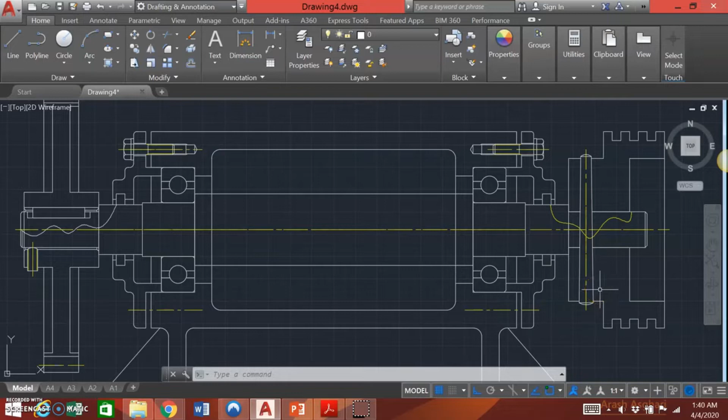It really requires some time for us to refer back to the drawing and then do the proper trimming. For instance, I forgot to trim this part, and also this part, as well as this part and this part. I hope I already trimmed accordingly.

Now if we refer back to the diagram here, we need to have a platform to place this bearing unit, and then we have a bolt and nut here to fix the bearing unit on that platform. So we need to draw the platform first.

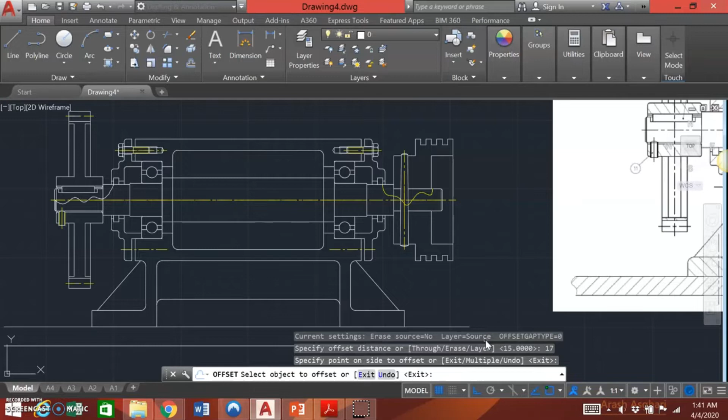What you can do is just pick a line from here, adjust accordingly, and then for the thickness of the platform, I'm just going to use the offset function and put 17. So the distance is 17 here.

Now we are going to insert the bolt and nut, which is part number 8. Washer is part number 9, and then the nut is part number 10.

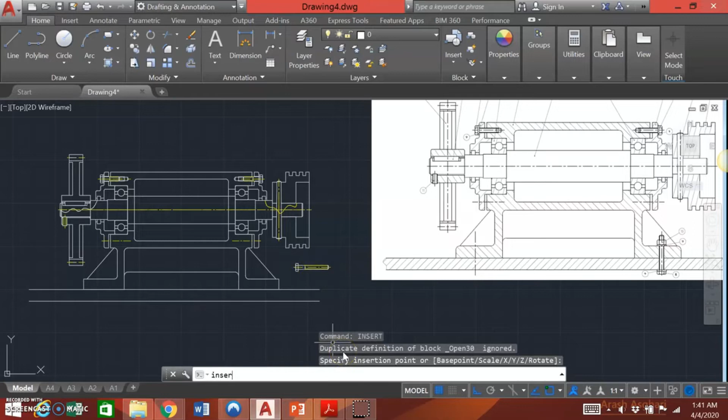Browse part number 8, open. Just place it here first, and then insert part number 9. This is the washer, so we're just going to place it here.

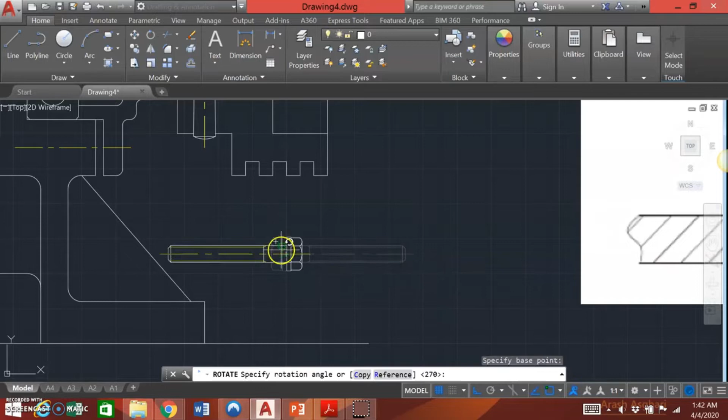So we have the bolt and the washer already. What we need to do is rotate this. Just pick some point, and then the rotation is minus 90. Sorry, it should be 90.

Now we want to move this to the bottom, so we pick this, move to here, and then from here we move, because this thickness is 17, so I'm just going to put 17.

After that, from here we need to move to the left side. Just pick, and then we move here by 20. Move, specify the point, and then move here by 20.

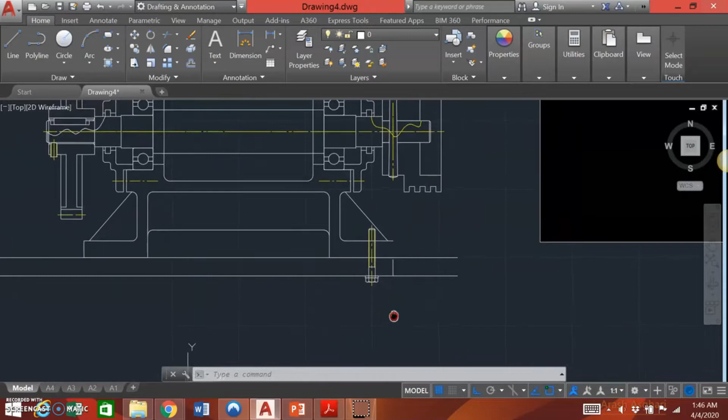I don't know what happened, suddenly this part disappeared, but it's okay, maybe during the time I copied it. So we can just move this back.

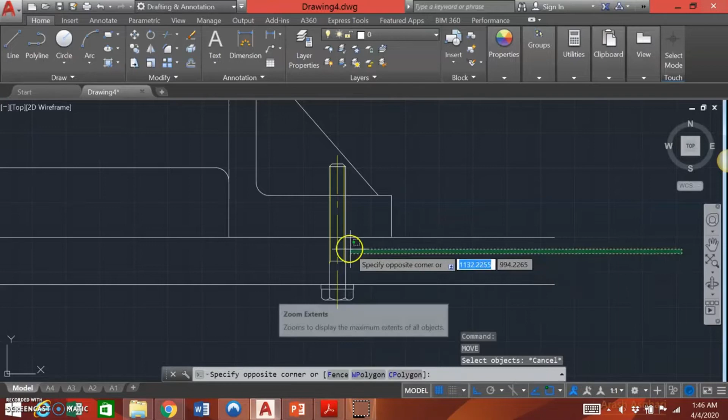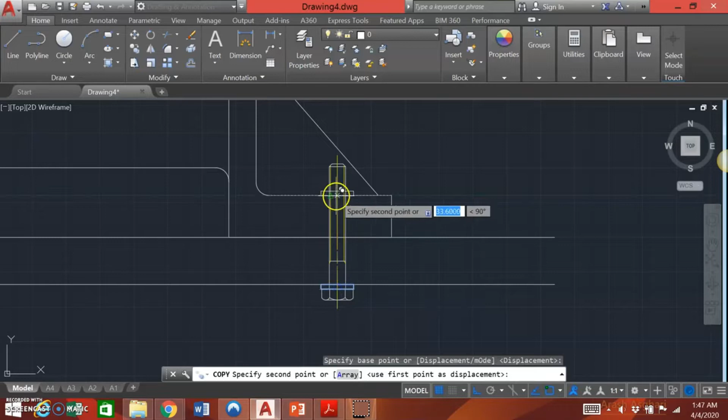Now we already have the washer at the bottom, and we need to also move one to the top. So we can copy the washer, specify here, and then we can go here. So because we have two washers, at the top here we need to install the nut.

Nut is part number 10. Insert, browse part number 10, open.

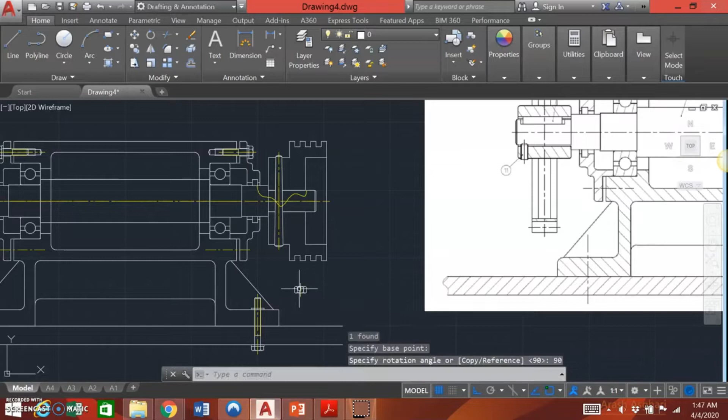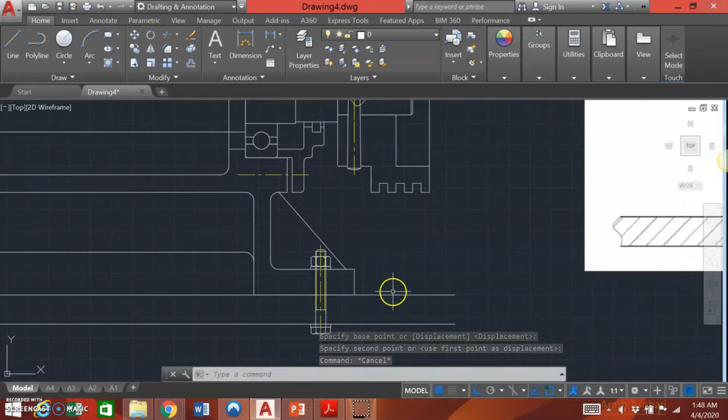What we need to do is rotate it first, 90, doesn't matter. So we are going to move this to here. Done, we already put a platform, and we have done the bolt and nut here.

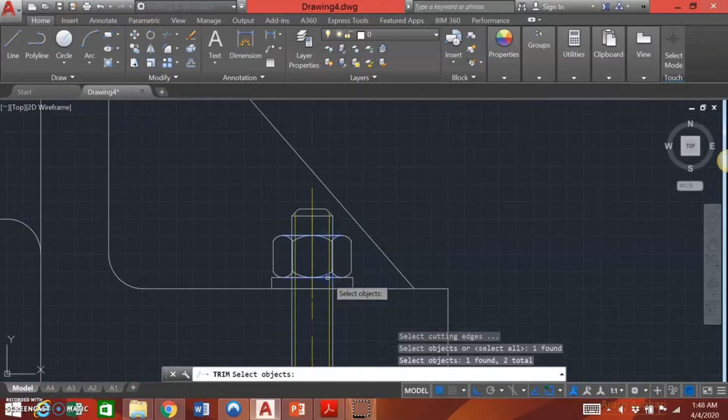Still need to do some trimming. Explode, so we need to do some trimming. I'm just going to choose this line and this line, enter. So all the lines that are not necessary shouldn't be there, and then trim. So this line, enter. All the unnecessary lines shouldn't be there.

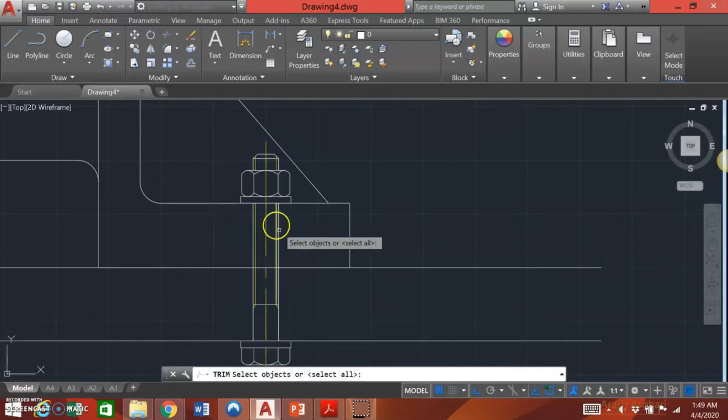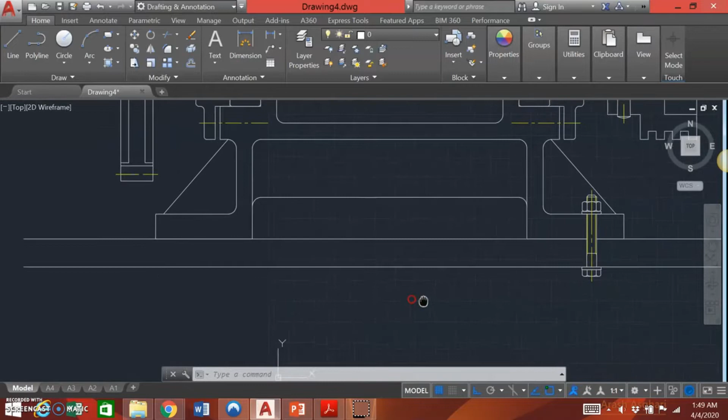Same goes at the bottom here. Enter, and then, so at the end it's going to be something like this, and we are just going to cut. We are going to close both ends of the platform by using...

We are going to draw a spline to cut this platform. So choose spline, and then, okay, like that, enter, and then same goes here, enter.

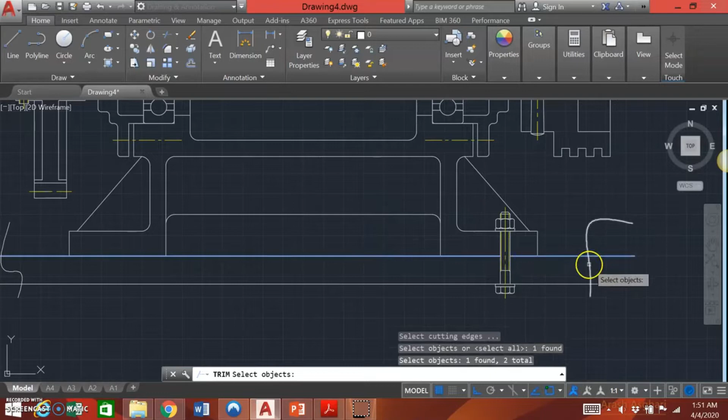Anything that is out of this part needs to be trimmed. Something like this. I forgot to put this. Okay, the center line here, you can join them together.

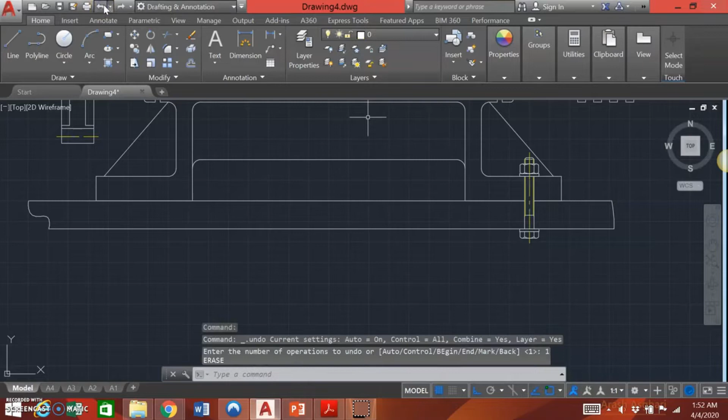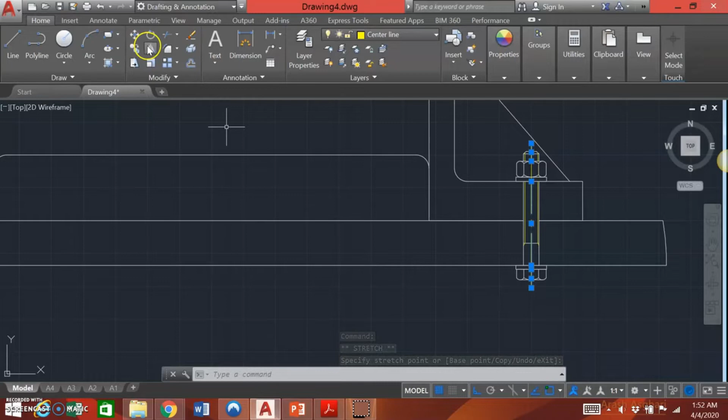Join, so that it's going to be only one center line, sorry. So join, then we can just copy or mirror, specify the base point, and yes, so we have both sides like this one.

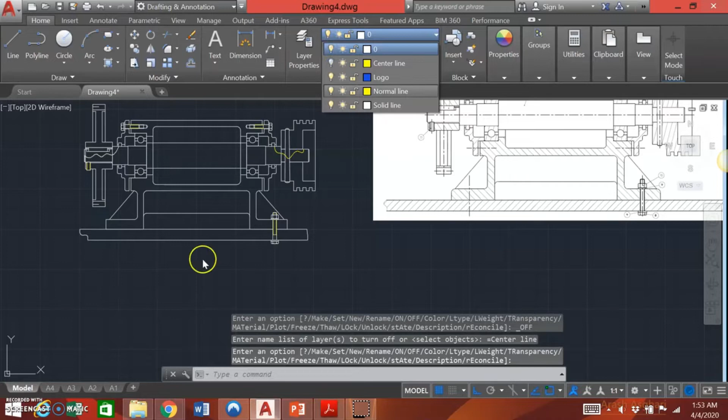The next thing is to do some hatching. I'm going to start with the platform first, but in order for me to do the hatching, I just need to turn off the center line, and I'm going to do some hatching here and also here first. Change the ratio here to 30 so that you're going to have something like this.

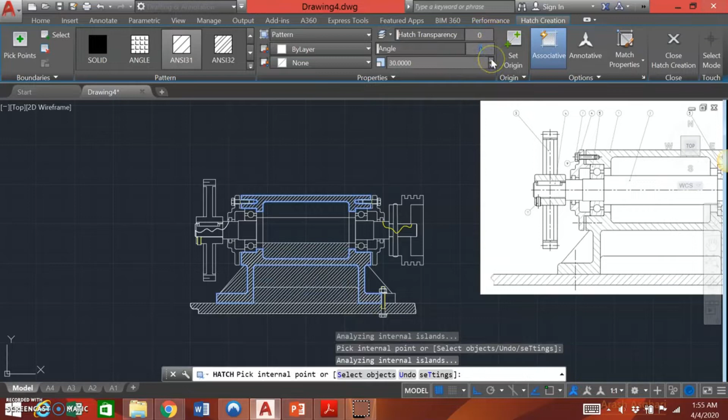And then I'm also going to do the hatching here, and also the top one. But if you can see, I don't want it to have the same direction, so we can change here to maybe 90.

I also will do some hatching here. Hatching this part, this part, this part, this part, this part, and this part, and change this to maybe 0 again. And then the hatching here.

So we still need to do some other trimming, the ones that maybe we left, also this one, this one, this one.

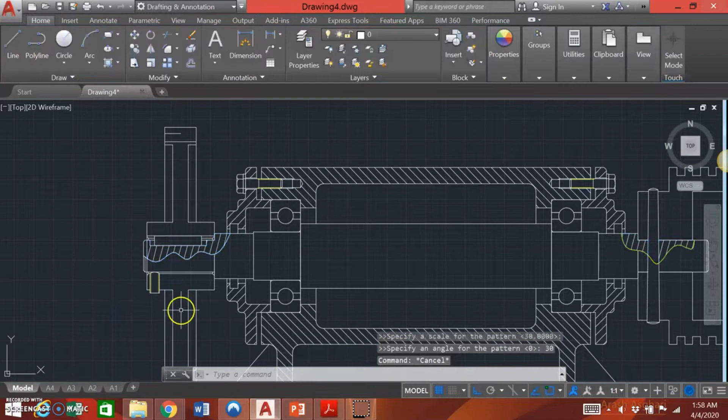Okay, so hatching here, and also here and here. We change this maybe to 30, so it's going to be a little different. And the last one is hatching this one and this one, this one, this one, also this one, and we set it back to maybe 90.

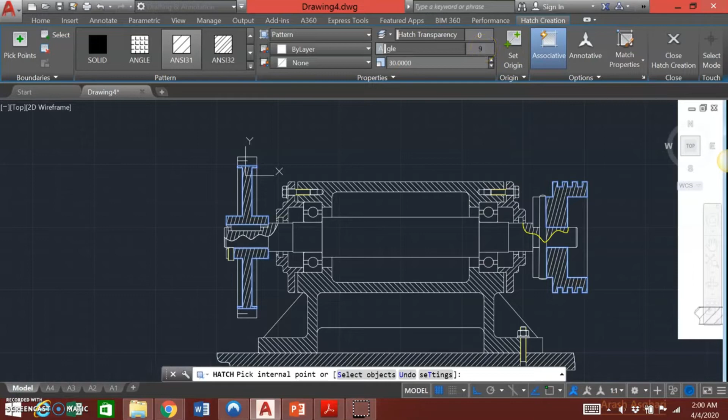So okay, it looks like a legit assembly drawing. So we turn back on the center line. Let us do the final checking of the drawing, whether we need to still improve it.

If I refer to this drawing, I found that I forgot to do hatching in this area and in this area. So let us do the hatching here. Go to hatching, pick this point, the ratio should be 30, the scale, and then the direction is 90 degrees. Okay, enter, and then we go to hatching again and pick this area as well as this area, enter.

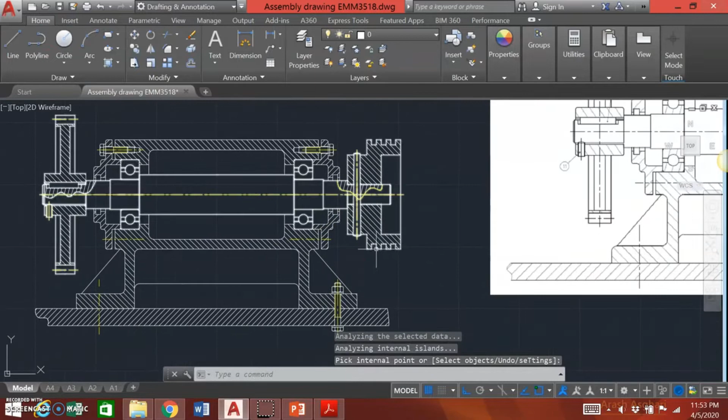So yeah, I hope that I did not miss the other parts of the drawing. Hopefully this is the completed one. So if after we do the final checking we found that we are satisfied with the drawing, the next step is to do the printing.

We want to print it in an A2 layout like this one. If you drew this unit bearing assembly drawing in your template, you should already have your A2, A3, and A1 size layouts. So we are going to print this in A2 for this drawing.

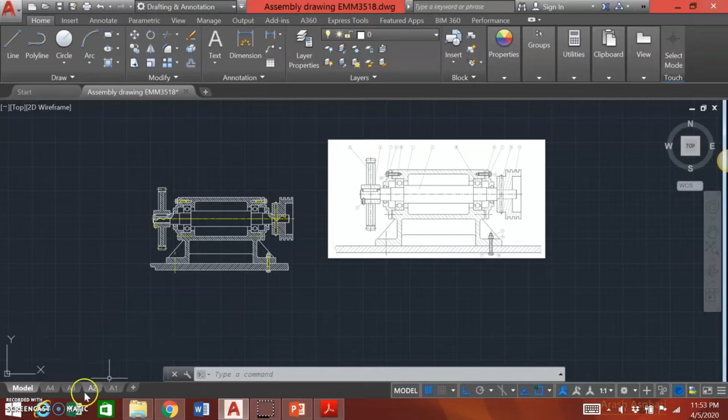So in order for us to properly print the bearing unit inside of this A2, what we need to do is to draw a rectangle first here. So use rectangle, and then the first point should be 0 comma 0.

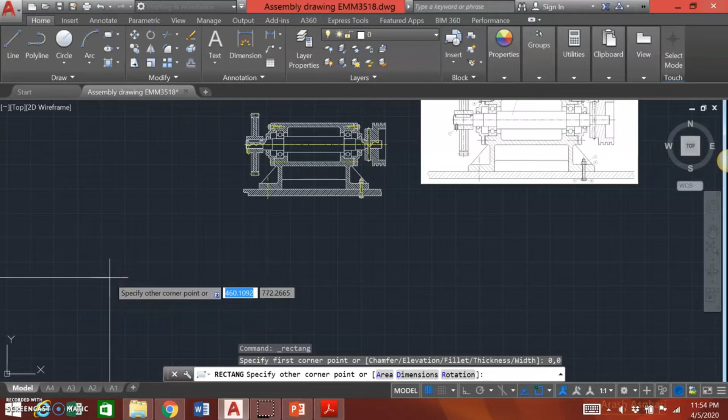So this is the base point, and then the dimension for A2 size paper is 594 comma 420. So this is the A2 size paper.

If you refer to the drawing, I think the drawing in its real dimension can be put in the A2 size paper. And for this one, the next thing that we need to do is to offset by 10mm, because this is the real size of A2.

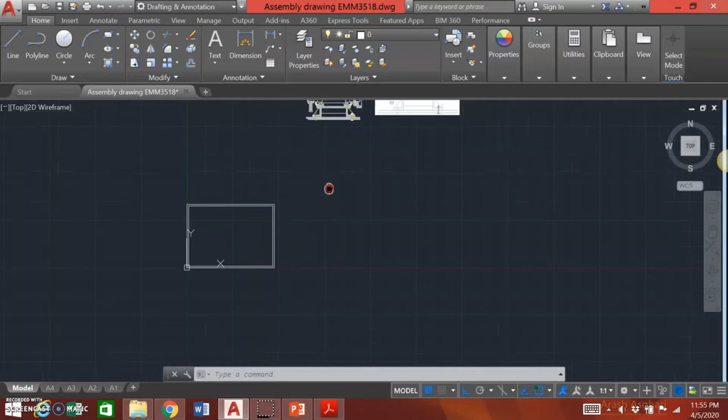However, for the data block we normally have a 10mm smaller dimension inside of the real dimension of the A2 size. So this is the rectangle size that's going to guide us to print in an A2 size layout. So what we need to do next is to move this object to be inserted inside of the rectangle.

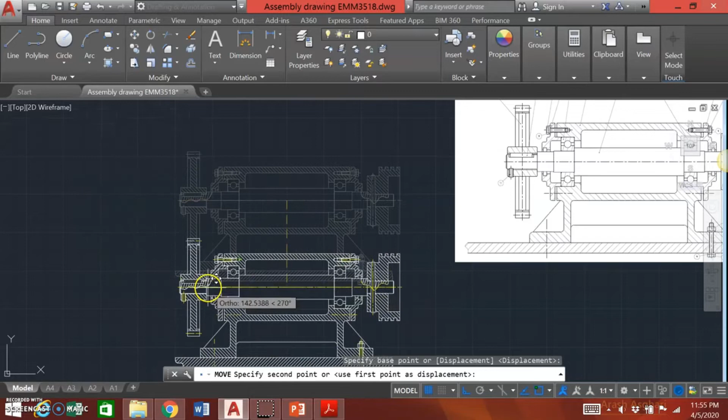So now select all and then go to move. The first thing that you need to do is select the base point, and I will suggest you select at the center, the midpoint here, and then you can move it. Make sure that you turn off the ortho mode, and you can change to polar to ease you moving the object.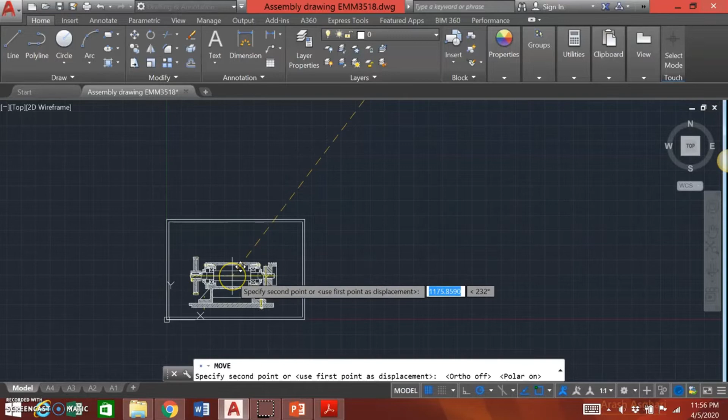And for this one, we are going to put it at the center. However, there's some trick to do it. You can click shift while clicking right click, and then go to 'mid between 2 points'.

So the first point is this corner, while the second—sorry, I mistakenly clicked it. So we do it again. So we are going to move this, change this to polar.

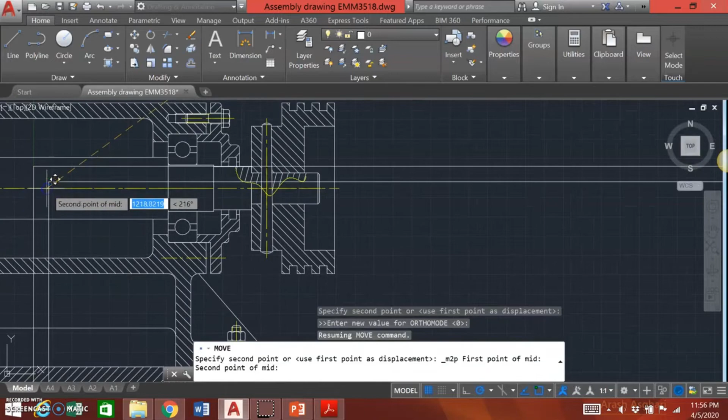Select the base point here, and then move it. Shift while right click, 'mid between 2 points', select the point, the first corner here, and then the second corner should be here. So it will automatically be placed at the center of the rectangle like this one.

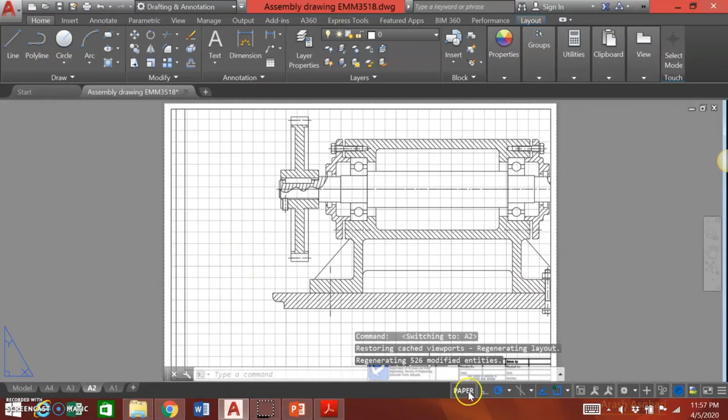And if you go to the A2 layout like this, it's not really exactly centered. So what we need to do, you need to change this to model space instead of paper space. So you can move it like this.

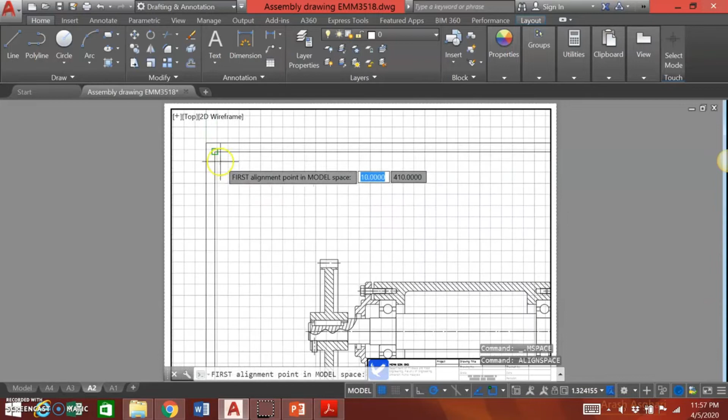And then the next thing that we can do is to do some alignment. So type 'align' space, choose align, and then you're going to choose the first corner here. The second corner will be here, and then the third corner will be here, the fourth corner will be here.

Okay, so after you did the align, the drawing will be exactly located at the center of the paper.

Once you already got this position, what you need to do is go down here. You can see there's some lock. You need to lock this so that it's not going to move. Otherwise, if you don't lock, it is going to move.

So the next thing that I want to do is turn off the grid, so it's going to look clear like this one.

And just for your own information, my title block is a bit different from yours. This is based on my own drawing. However, you can use your own title block according to the one you already prepared. Mine looks like this, but it should be fine.

So the next thing that we are going to do after we have this picture, we can already print this out. However, as a standard assembly drawing, there are a few elements that need to be inserted in the drawing, such as the balloons.

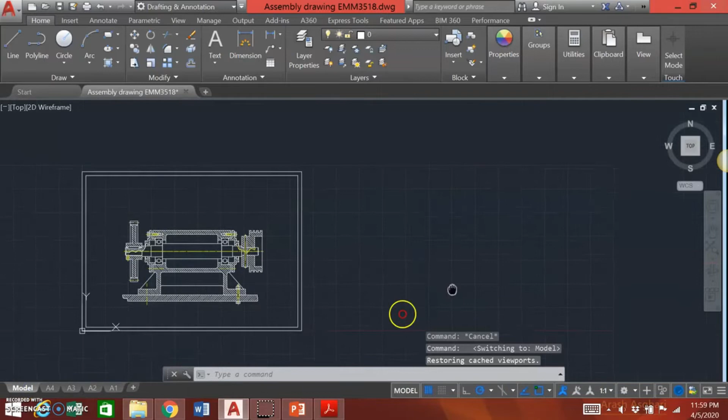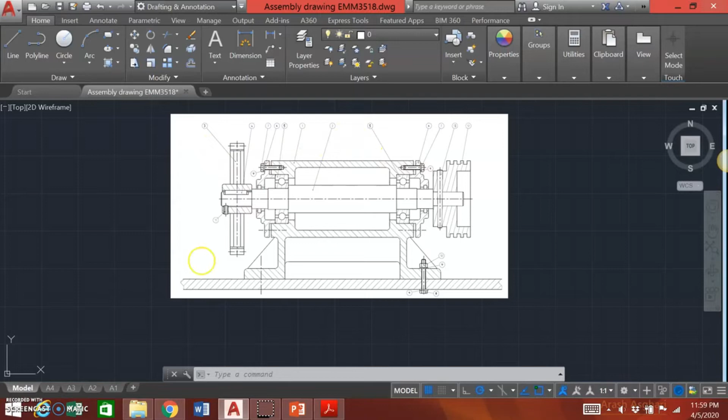What I mean by the balloon, if you refer back to the drawing, you can see the balloon showing all the parts assembled in the bearing unit. We are going to include all the balloons to show different parts of the bearing unit in the A2 size layout. To do that, you need to change this model to paper space.

So now it is in the paper space. That means you can do anything inside the model part, but you can also do something in the paper. Now I'm going to show you how to do the balloons.

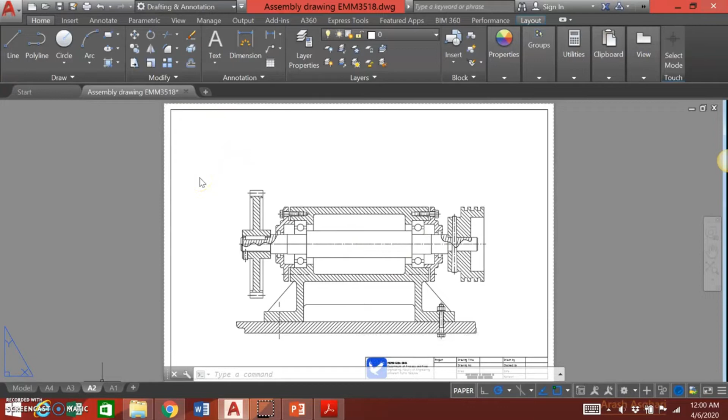You need to go to Annotate, then go to Leader. Some of you might already have it in the ribbon, but in some AutoCAD versions like mine, we have to choose Leader and then Multi-leader. You need to change this to balloon instead of standard. So now it is balloon.

What we can do is just include all the parts. Choose multi-leader, and then I think the best way is to turn off all of this, so it makes the balloon easier for you to locate. So this is just click, then click another one, and something like this appears.

This is part number 1, which is the casing. After you put the number, you can just click OK, and something like this will appear. What we can do is put all the parts' balloons according to different parts. The second part is the shaft. Same thing, multi-leader, click here, go to here, number 2.

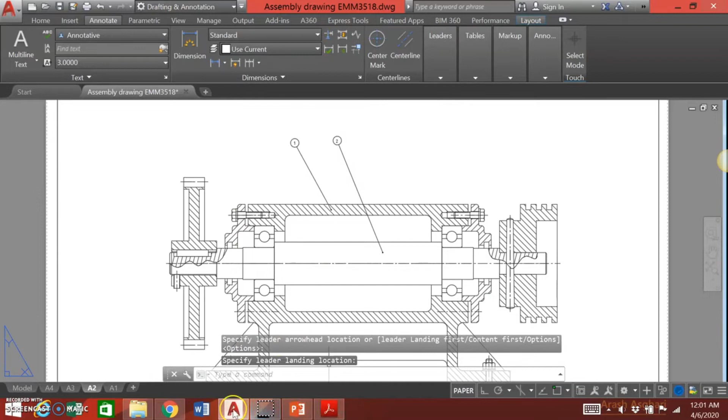What about number 3? Shaft is number 2, okay, number 3 is the gear. So multi-leader, this is number 3.

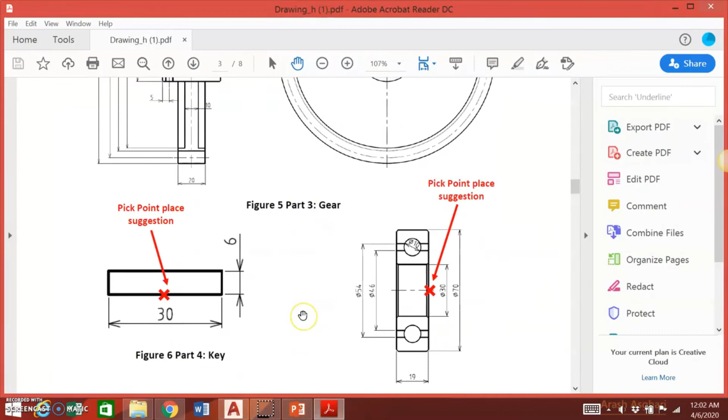Number 4 is the key, and number 5 is the bearing. This is number 4. And this is number 5, which is the bearing. Because we have two bearings here, we're just going to put this as number 5 too.

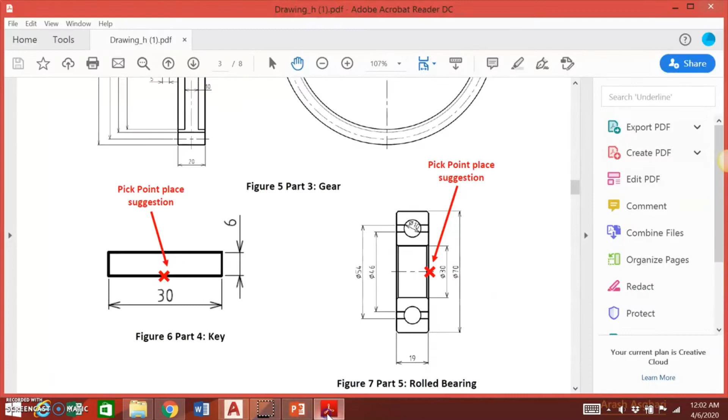What else? Lid is number 6. So this is number 6.

It's okay in terms of the position of the balloons. I'm going to show you how to align all the balloons after this.

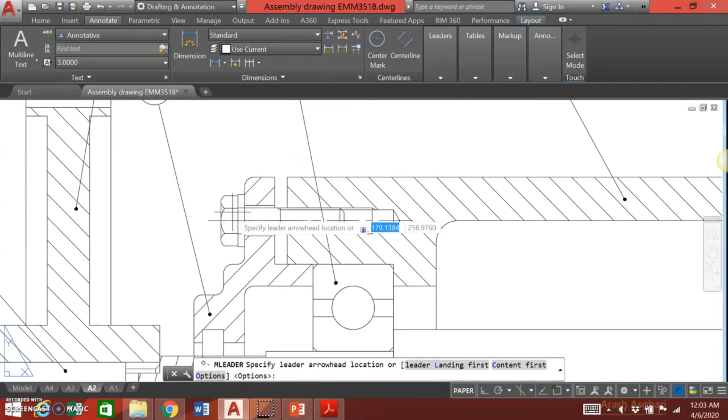So number 7 is the bolt. This is the bolt, this is number 7. Same goes to this bolt, this is number 7 too.

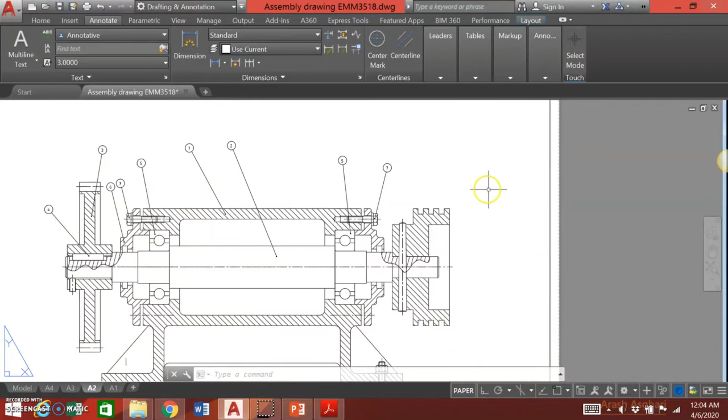What about number 8? It's another bolt. This is the bottom, so we are going to go to the bottom. This is number 8.

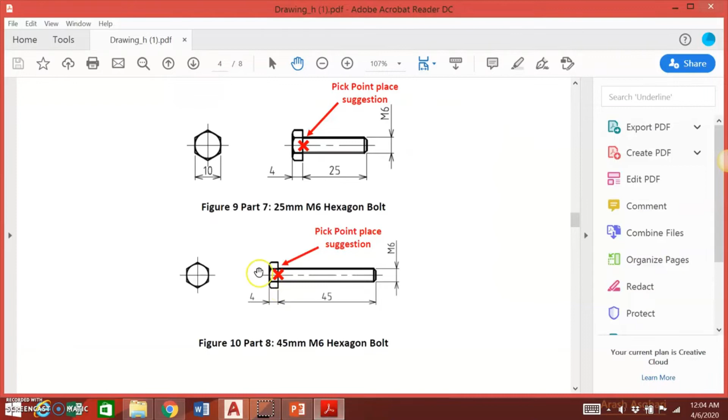Washer is number 9. So we go to the washer here. The washer is a bit small, however we can enlarge this. So this is washer, and this is number 9. Same goes here, number 9.

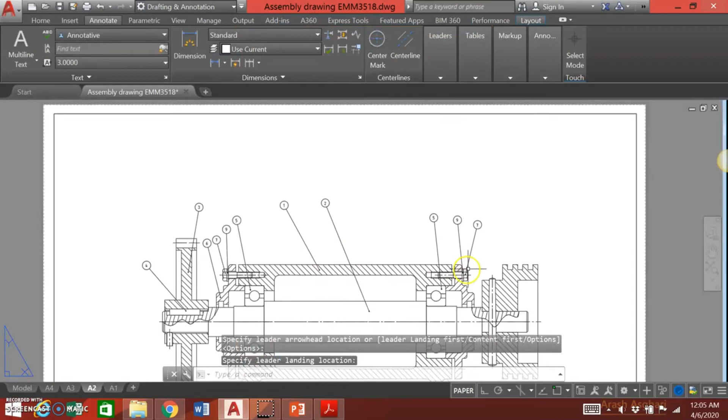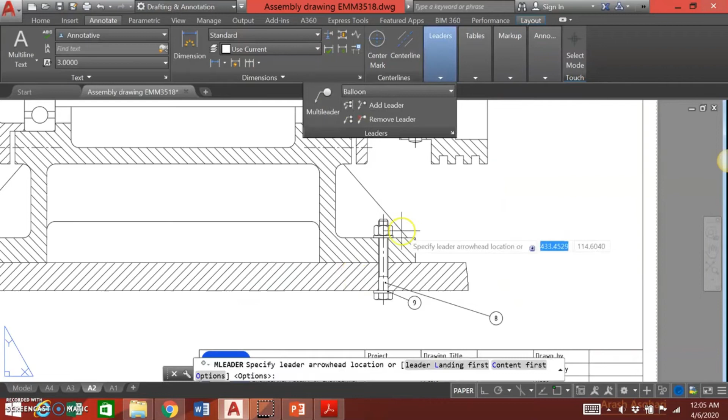Here also got the washer, this is number 9. This is also number 9.

Okay, then nut is number 10. This nut, number 10.

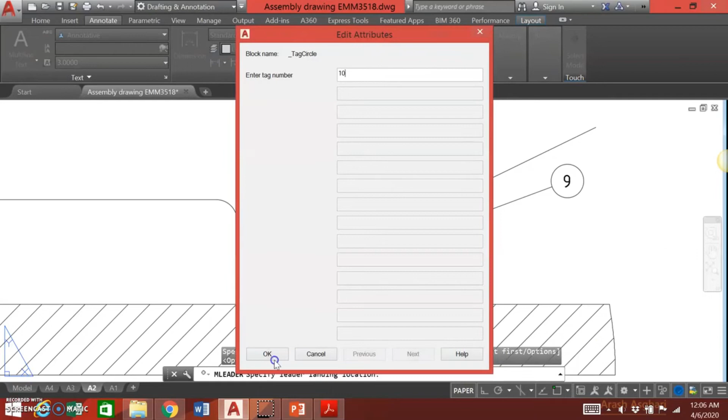Okay, stopper bolt is number 11. So this is the stopper bolt, this is number 11.

Pulley is number 12. And lastly, pin is number 13.

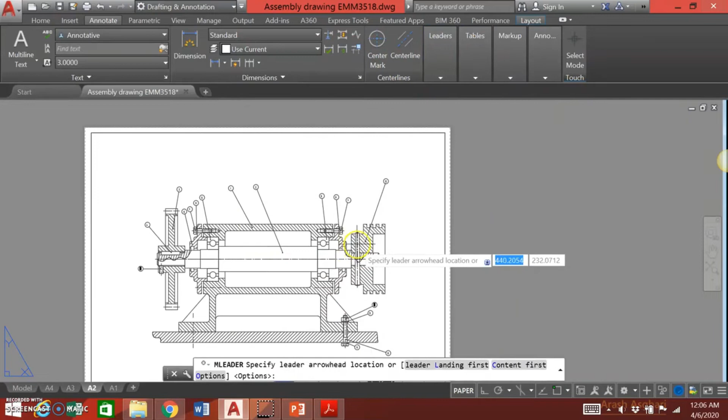And this is the typical type of assembly drawing, general assembly drawing, where you should have the elements of the balloon, the drawing, and a few other things.

So what I want to start with for this video is to show you how to do some alignment of the balloon here, because you can see that it looks a bit messy. We want to align it so it's going to be on the same line. So just choose all the balloons that you want to align.

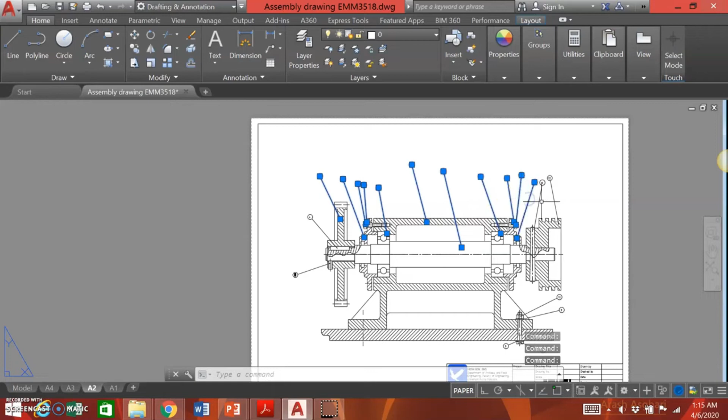Then go to Annotate, Leader, and try to find this symbol, which is for the alignment. Click this, and then you can choose which level of line that you want. Let's say I want all to be in line with balloon 3. After that, you just move it to the right side.

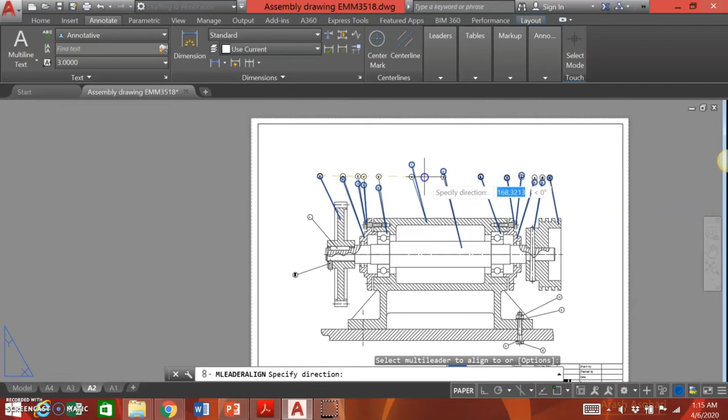So now it looks lined up, it's going to look something like this. It looks nicer compared to the previous version. And in fact, you can also do it individually. For instance, like this one, I want to stretch it a little bit more, and this one too.

Something like this is going to make your drawing even nicer. Besides the drawing as well as the balloon, we need to have the bill of material, the parts detail, something essential in the assembly drawing, which I already covered in lecture 10. You should go through the notes given in lecture 10, where the assembly drawing consisted of a few types, including the exploded version, the general assembly drawing which is what we are doing now, and the detailed assembly drawing which includes all the dimensions.

For this lab, we are doing the general assembly drawing, where one of the elements required is the bill of material, which consists of all the parts listed here, and the detail of the part, including the quantity, the material, and so on.

So what we can do now is draw a table on the top right of the layout. Go to home and pick line, turn this on, and from this point click and go by 80mm, enter. So you have the line of 80mm here, and then we're going to do some sections.

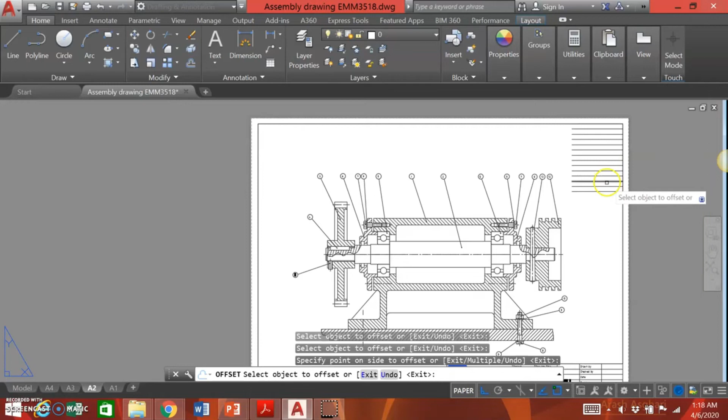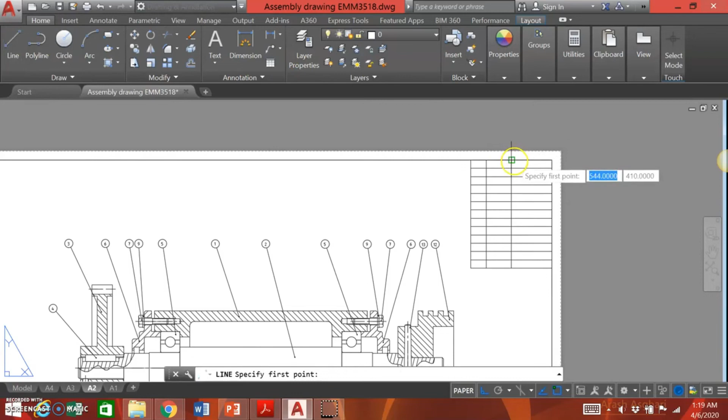After that we can just close this section like this, enter. Then draw another line, let's say 15, draw, enter, and then another line of 25, enter, and then the other line of 10, and one more line of maybe 10.

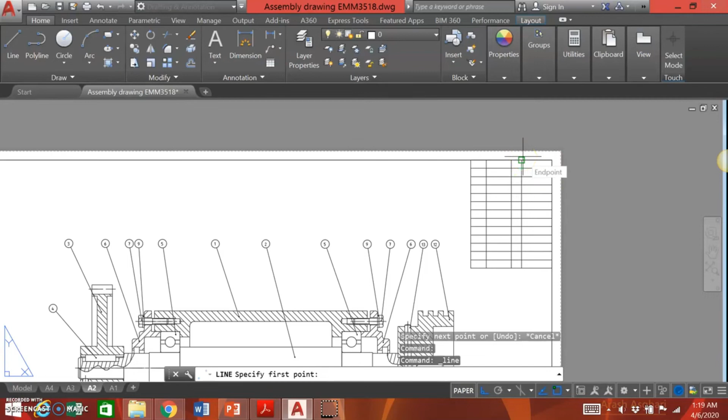Sorry, maybe we can have this instead. Okay, that should be fine. And a line of 10, and just going to delete this line.

So now we have the table where I'm going to include all the details of the parts. We can use this multi-line text. Click and specify the first corner and the second corner, then make it middle center. This is going to be the part number.

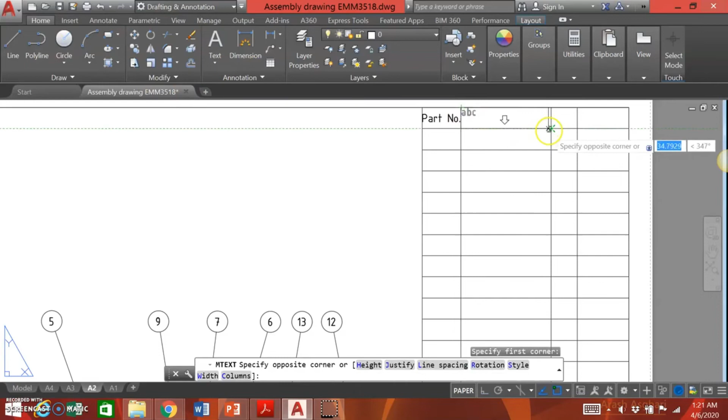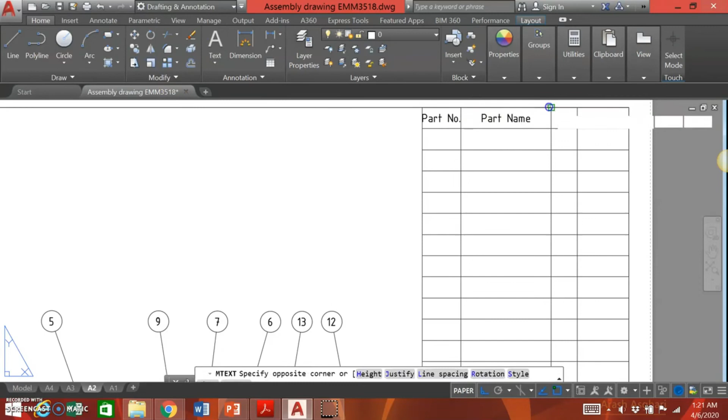Then another line from here to here as the part name. Sorry, we do the justification first - middle center - part name. And then quantity, and lastly the material.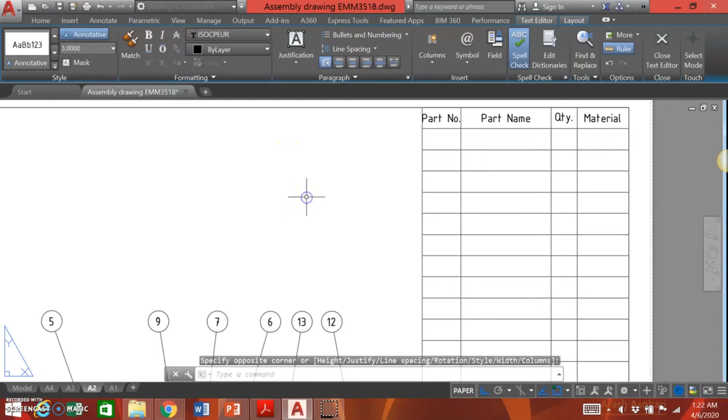So we have all the list here, so we can select all of these and then copy - select the first point and then go to the second point, enter. So maybe we can do some adjustment first.

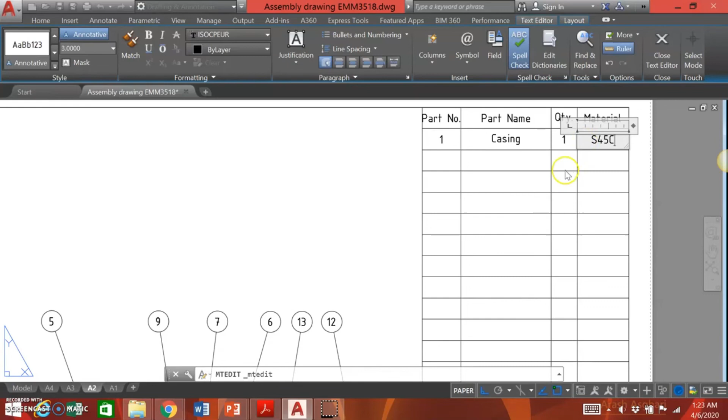Part number 1 is the casing, and the quantity is, let's say, 1. The material - well, it depends on what material you want, but you just follow the code that I type here, it's S45C. After you complete the first part, you can just copy this.

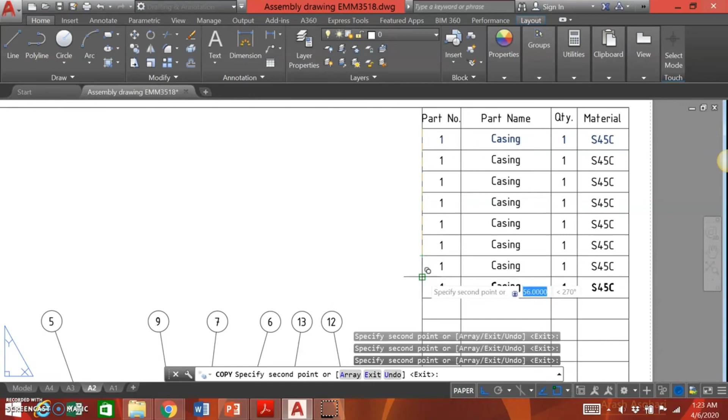And then we are going to do the same to all the other sections. I'm going to write down all the details of it, and I really hope that you're going to follow the details that I'm going to include.

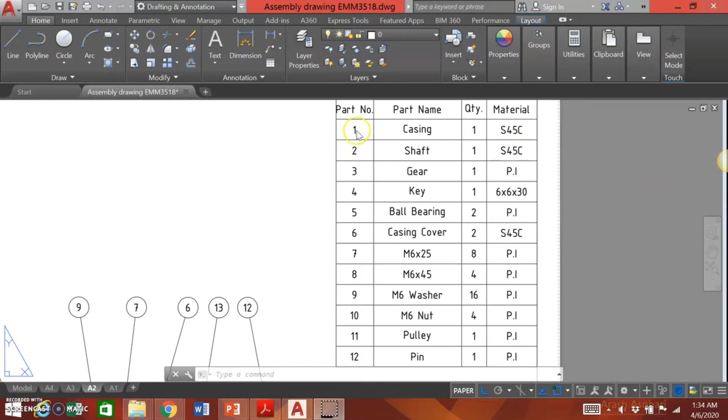Now I've included all the information needed for each part. You can just follow this as a practice for you - part number 1, 2, 3 until 13.

I forgot another part, which is the stopper - I forgot that we have 13 parts, so just going to include the other part. Offset 16.

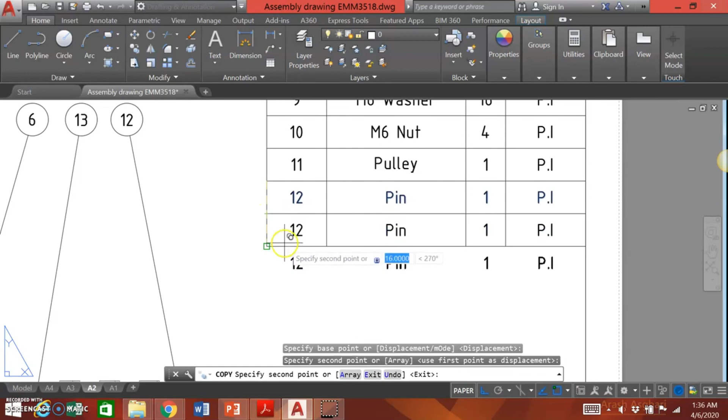Okay, and then we're just going to extend this, and this, and this, and this, and then we're just going to copy. So this is part number 13, 12. I missed part number 11, which is - this is not supposed to be pulley, this is supposed to be M6

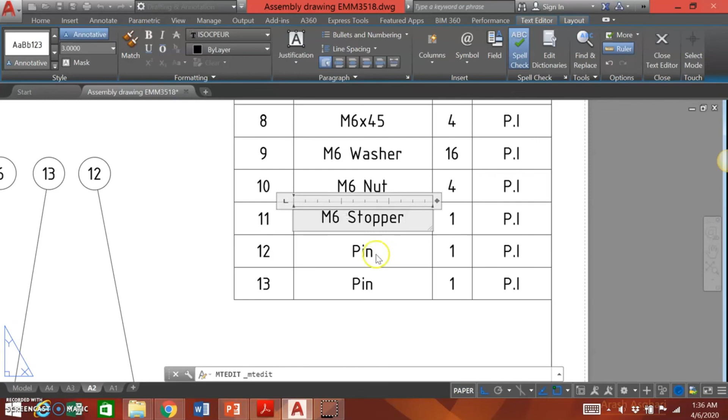stopper. And this is pulley. Okay, but the rest is fine.

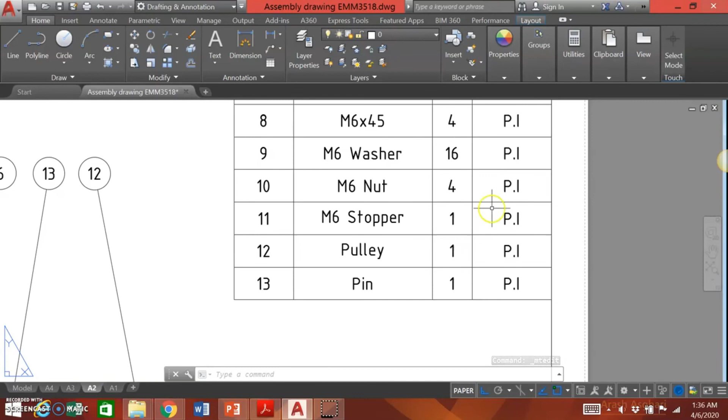So I really hope that you're going to pause this video for a while and try to include all of this information in the table. After you complete the table, the final step is to include some major dimensions, needed for the assembly drawing, where you can just go to dimension here, click dimension, and add some major dimensions such as the length and the height.

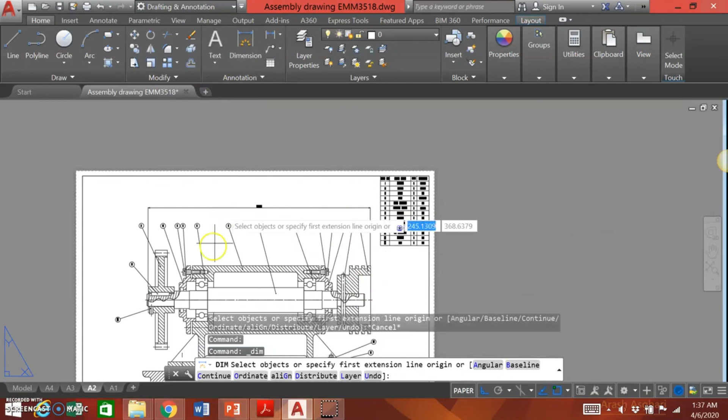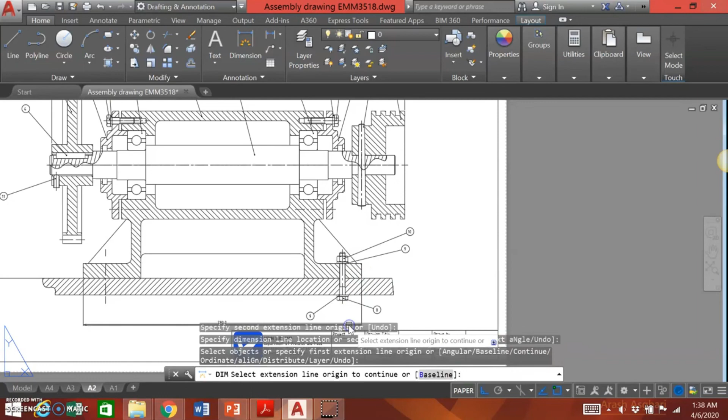Just going to show you the height. Okay, so you have the balloon as well as the dimension. If you notice, the dimension is in point with 1 decimal.

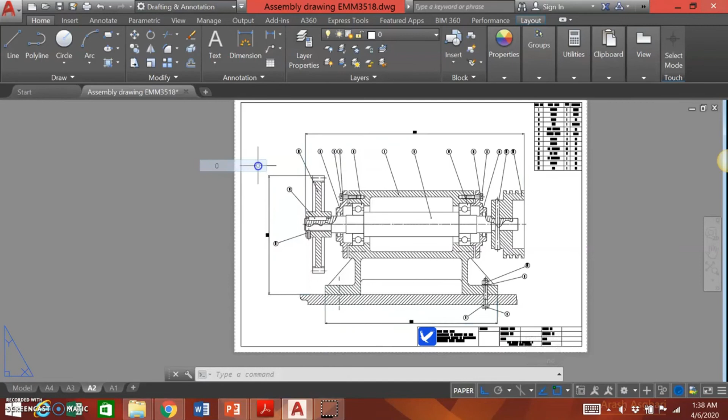So what we can do is just click this, and click the dimension here, then right click and go to precision, just click 0. So now the dimension is only without any point.

So this is kind of like the typical assembly drawing that you need to prepare for a real industrial experience. I really hope that you got some exposure on how to do it, and hopefully we're able to do the same for other types of assembly drawing.

So that's it. After this you can just save, and if you want to print, you go to print, continue to plot single sheet. Make sure that the ratio is 1:1. This is ISO full bleed A2 and so on. Just click OK.

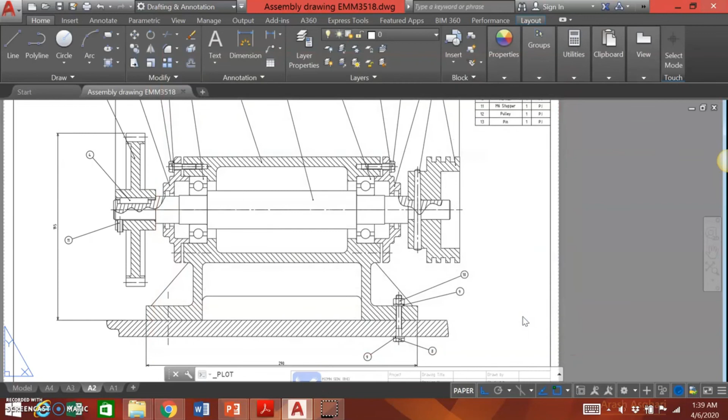PDF, okay, and then in the document save as one, so it's going to be saved as a PDF. So this is how it's going to look like in the PDF style. So it's going to look nice.